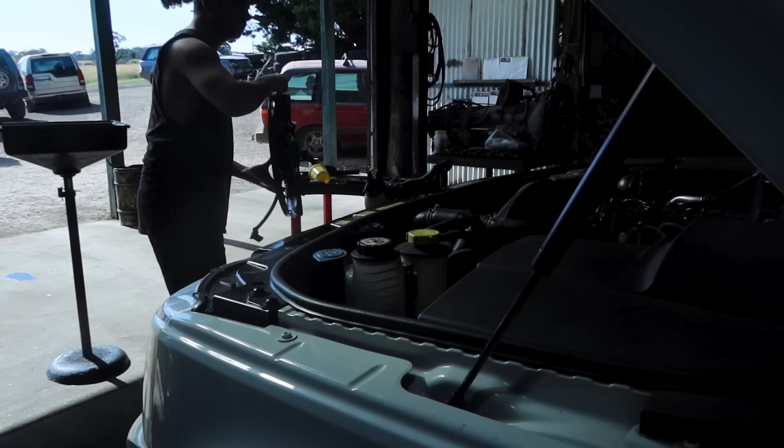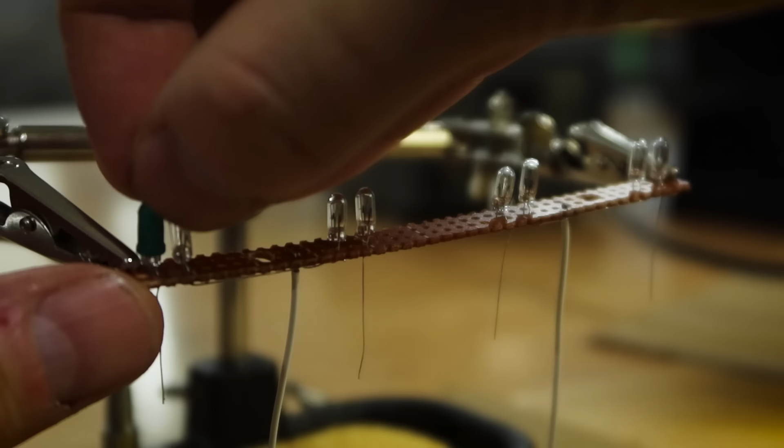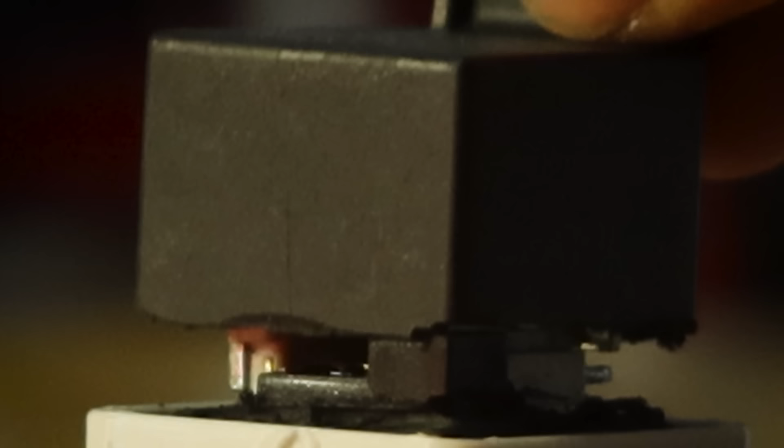In the last video, I had quite a few people asking me about a bit more detail in the design process. Like I said in the earlier video, I wasn't happy with the effort I put into V1 of the switch panel, so I started again, and the design idea became OEM Plus. I want the switch panel to look like it could have been an optional extra in 1974. So, what are our design considerations?

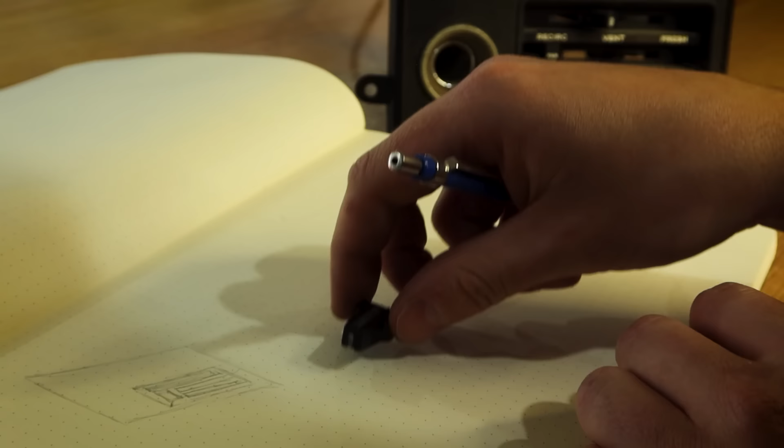You'll note this bezel detail around the heater controls is pretty prominent and also present on the radio section as well. So I'm going to take this as my inspiration for the outline or the border. The factory dash has these little knobs to adjust the heater controls, and so I thought I'd use them as inspiration for the new custom ones.

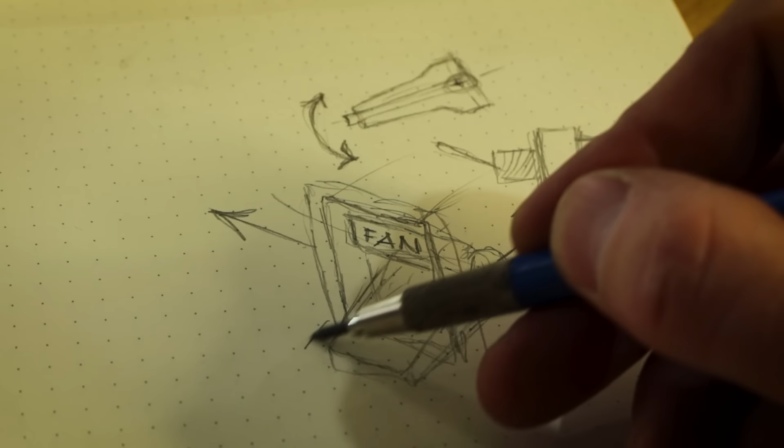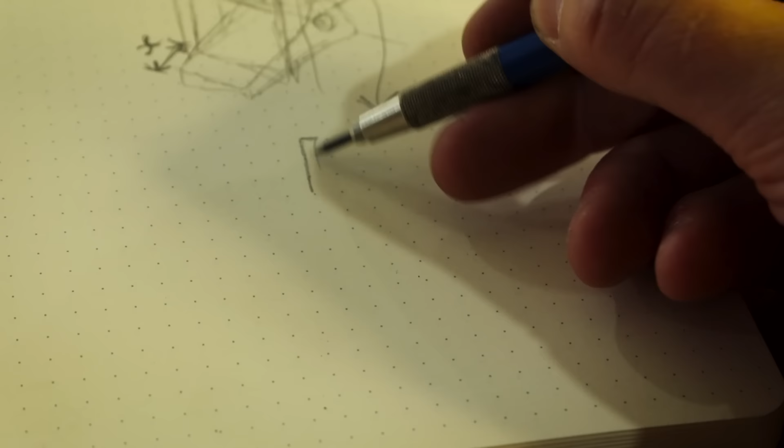I really like the vibe of a 70s and 80s Ferrari, De Tomaso, etc., and the chunky style switches. I imagine them having a nice solid clunk when you throw them, so I think I'd like to make an enlarged style switch inspired by these ones. I would also like the name of what I'm switching to be present, as well as an indicator light, so I combined the two, but I also want the text to be large enough to be read comfortably. So that basically gives us our minimum bound for the design.

Finally, I've got these old school Amori gauges that I want to incorporate, and given space restrictions, I decided on 2 gauges off to the side, which leaves us this space above the heater controls, which, given the other limitations I mentioned earlier, will divide nicely into 4. Cool. Now we've got a rough idea of layout, we need to think about packaging and manufacturing/assembly. So we've got these things to think about.

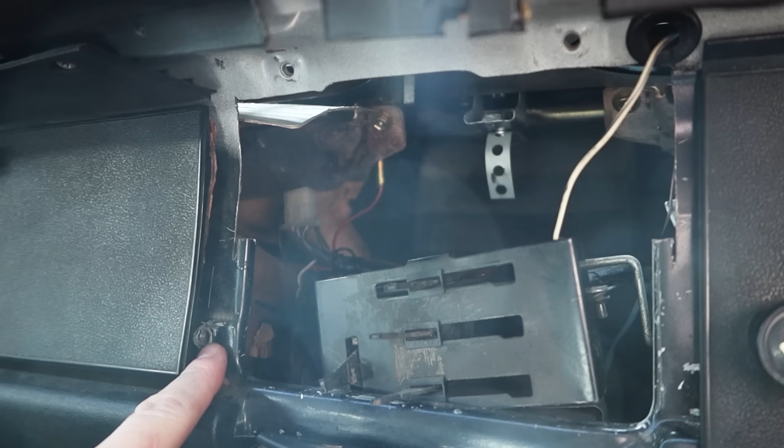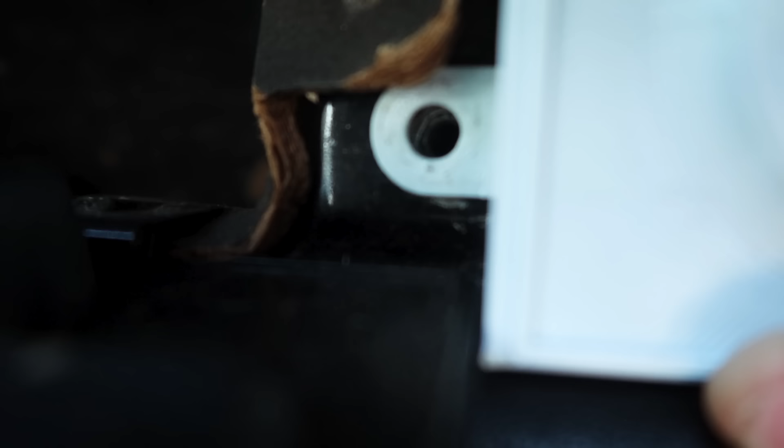Dash mounting points. The OE dash is a steel bracket with a plastic face. At this stage I'm not sure if I'm going to replicate that, but my initial thought is that I ideally wouldn't, and I'd just make the mounting points from the 3D print. Something else that I see people commonly do would be to modify the OEM part with their custom design. There's a few reasons that I don't like this. One is that if I ever wanted to make more, I'd have to get more OE fascias, and Toyota isn't exactly making new ones anymore.

Two, it can be difficult to be repeatable, and depending on the design it may introduce new limitations. But most of all, permanently modifying the vehicle is one of my last resorts. I like the idea of being able to return the car to stock if I ever wanted to, and as much as possible to be able to preserve the originality of non-replaceable parts. We could obviously argue specifics at this point, but you get the idea. If I don't have to do it, I'll try not to.

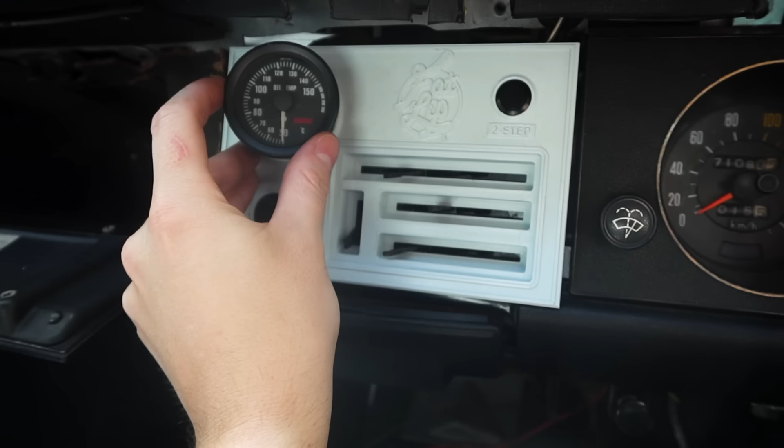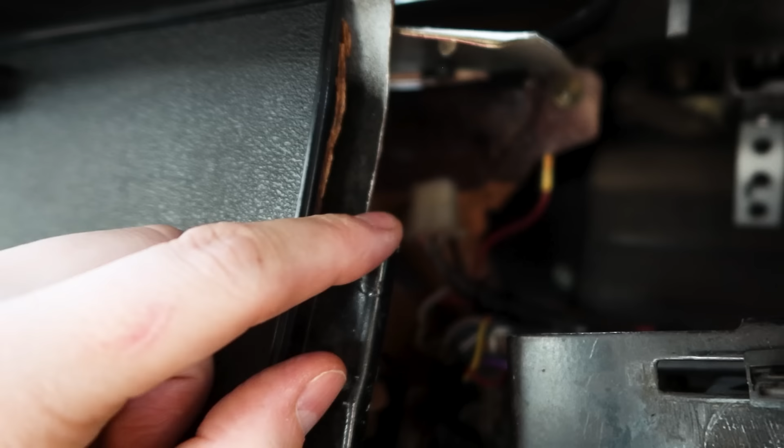Back to things to think about, I'd like the gauges to be slightly angled to the driver, and therefore, depending on the depth, they may exceed the envelope of this area and interfere with the frame of the dash. Not only that, we can see that mine has been somewhat unceremoniously cut to wedge an aftermarket head unit in there, so I want to make sure I don't make my design wider than the standard area, as then it wouldn't work in another car with a factory dash that hasn't been cut.

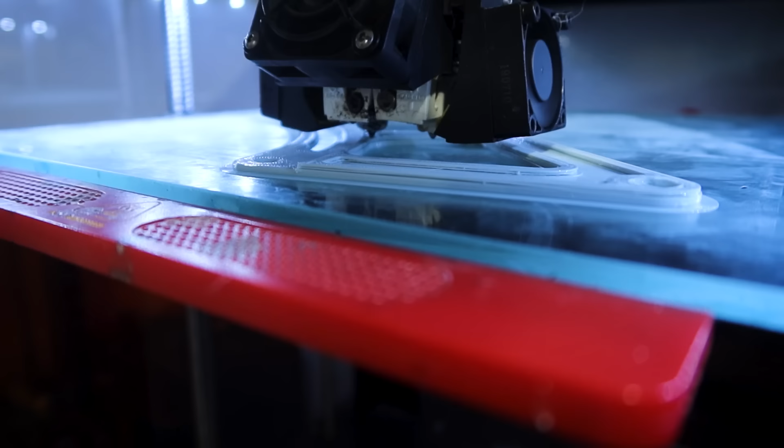The heater controls actually mount to the steel frame, and if I don't replicate or include a steel frame with my design, the plastic design needs to be strong enough and also provide some form of mounting solution as well. Finally, we need to determine what I'm at least initially thinking about manufacture. Likely it'll be a combination of resin and FDM printing.

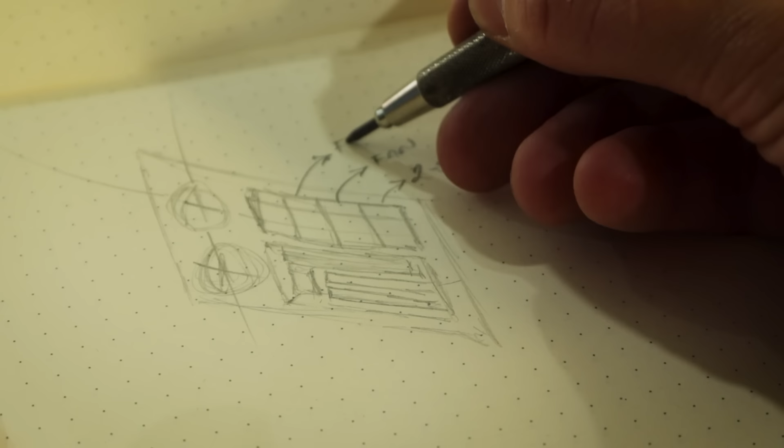Great, we're getting an idea here. Now what are the 4 switches going to control? I also have the need for a few more switches to control some other things in the future, but they're going to be mounted elsewhere. Okay, so what requirements do the 4 things I'm going to be switching have?

Well, the KE25 actually uses no relays from the factory. As a result, switches are known to suffer from burnout, particularly things with high load like the headlight switch, and they also use these dodgy little glass fuses. So in the perfect world, the whole car would get a rewire, but let's not become a victim of scope creep. Therefore, I'm thinking a relay box that feeds from the switch panel and to the components.

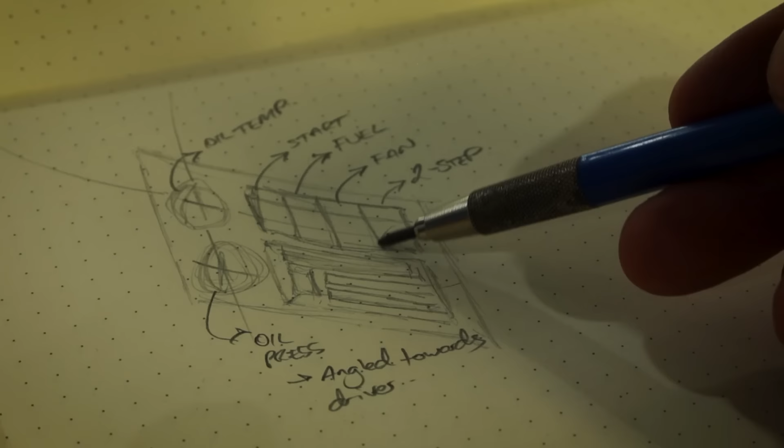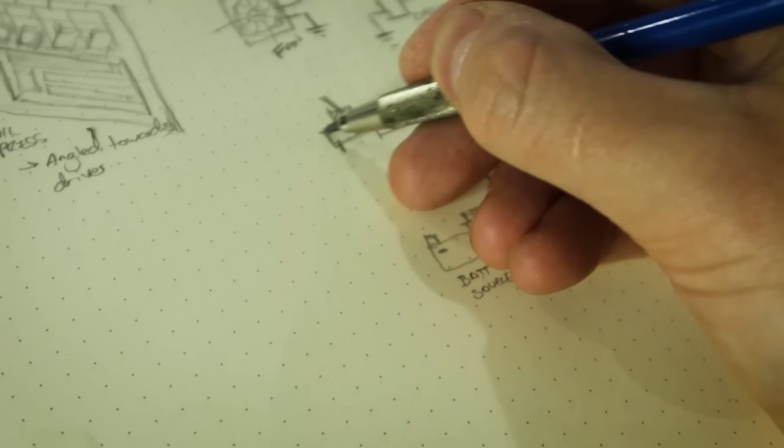So regardless of the physical reality of these systems, they do also have some minimum requirements for wiring that will have to be satisfied no matter what. So let's start there. So what are our thoughts here? We want the switch panel to be compact, we want the indicator lights, efficient wiring, and for the thermofan we want 2 switching options. This will require running switches on the ground side, however the latching loop for the 2-step requires wiring a switch on the positive side. So that means no matter what, we're going to need to run positive and negative wiring to our switch panel. Don't worry if that's gone over your head, I'll get to that.

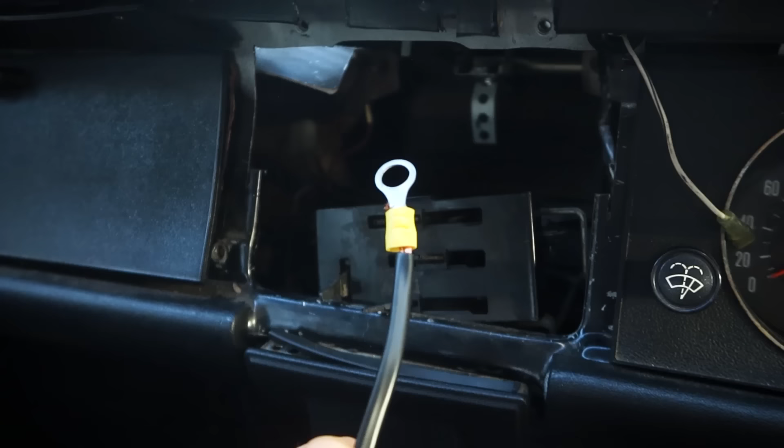Also, I don't want to forget this loop here, because if one or both of the lamps blow, I still want the circuit to be functional. We've also now determined that we're going to need at least 6 wires here, 1 for each switch and 1 each for positive 12 volt and ground. I could, in theory, run a ground wire straight from the unit to somewhere nearby on the chassis, but I think that'll look messy. I'd like it all to be nice and tidy with just the one connector.

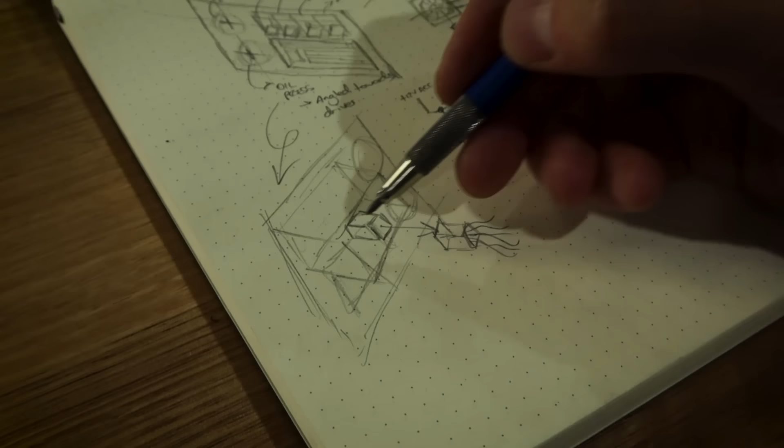So how are we going to wire it? I'd like the switch to be standalone, so we're going to put a plug in here. I could make it with a loose tail, but I think I would like it to be recessed into the unit and all nice and self-contained. As we've determined we need 6 wires, for now I've decided on this 6-pin Deutsch style plug.

There is temptation here to just get stuck into the switch panel design, but we don't know what we don't know. And I'm a mechanical engineer, not an electrical engineer, or an auto electrician. So let's finish our electrical plan and also run a bench test to make sure everything's going to work as we intend it to. This is another one of those times where I wouldn't normally share something that's unfinished, but consider this a work in progress.

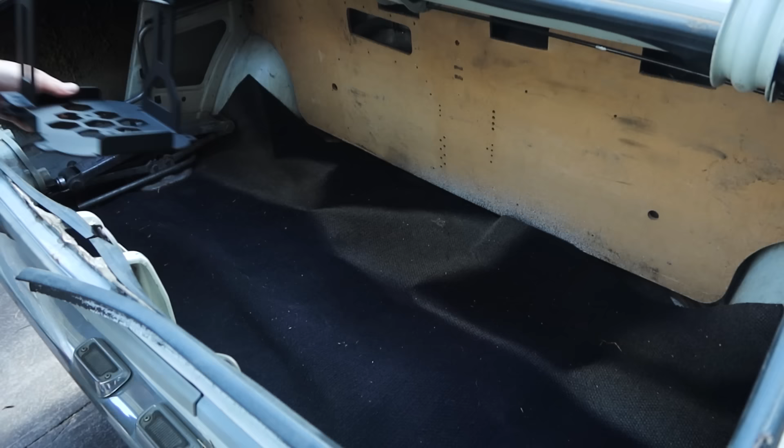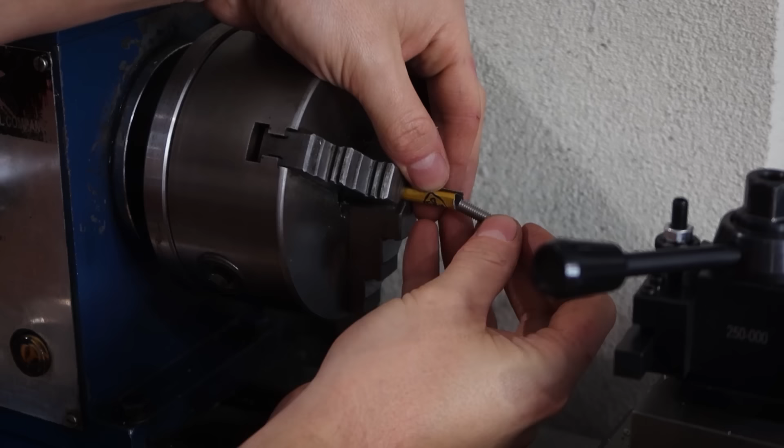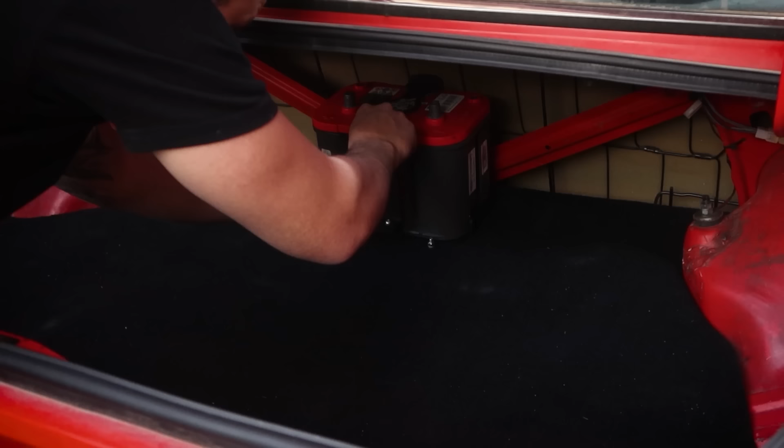Why is this important? Well, that will move the power source from the front of the car to the rear. So I need to ensure that whatever I make is flexible enough that changing the setup won't affect what I'm making now in the future.

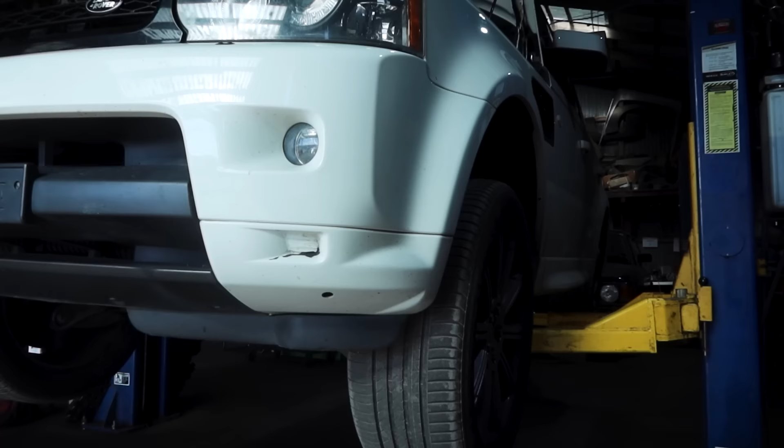Here's where I must interrupt our progress, as the L320 decided to start leaking power steering fluid.

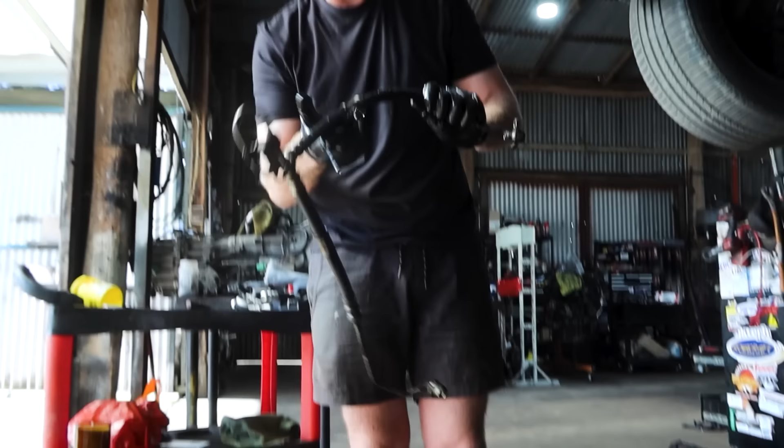And luckily, there's nothing Angelo would rather do more on a Saturday morning than work on my car. I'm pretty tempted to cut these. Holy shit. And obviously I was doing all the hard work. Someone's had a go at this. Oh man, they taped it up. They do a good job. No.

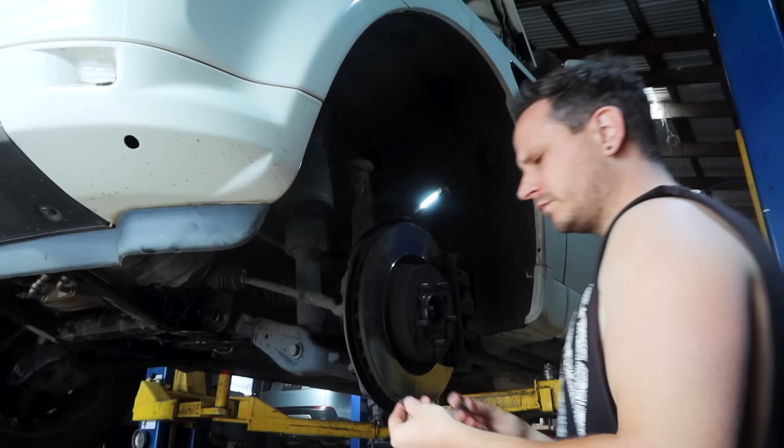Turns out, for reasons unknown, the power steering line decided to migrate over and become friends with the thermofan, and believe it or not, cars that weigh over 2.5 tonnes receive some benefit from functioning power steering systems. But all things considered, it actually was one of those jobs that should have only taken an hour, and in fact only took an hour. I guess it's a Christmas miracle. Thanks, Santa. I mean, Angelo.

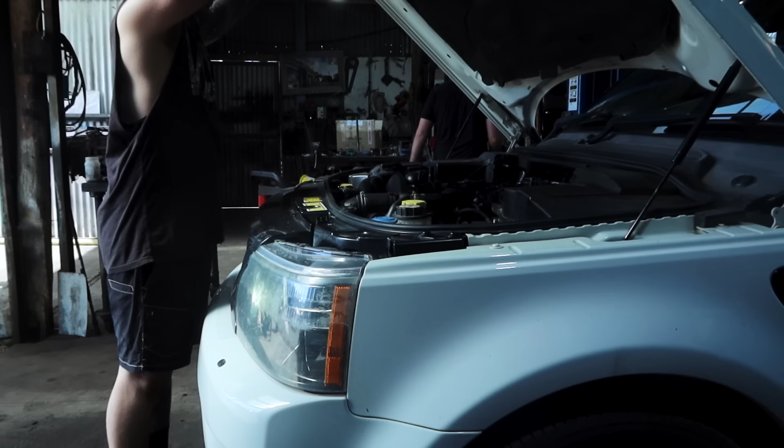Okay, specifics. Let's talk about switches. So I've been talking a lot already about packaging, and being that we're running an external relay setup, there's no reason we can't run some nice, small and compact switches here. However, these ones just don't have that sound and feeling I want. So I got these ones. Cool, how are we going to integrate this?

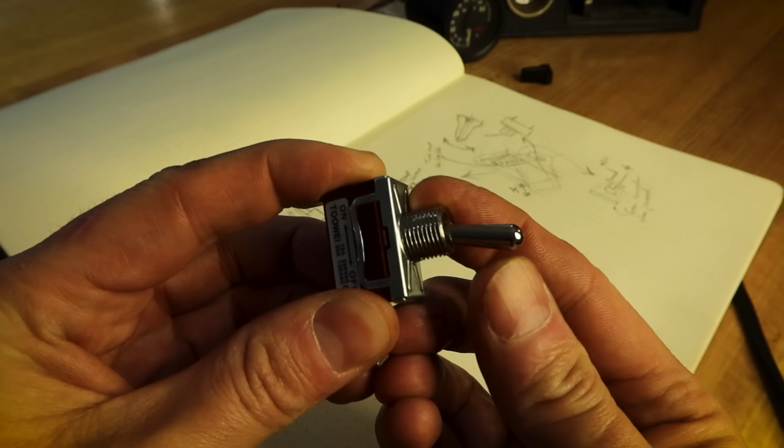I like to make a CAD model. Does it need to be as detailed as this? Absolutely not, and I don't always do them to this level of detail, but I do like to. Another positive thing of having the detail in this is that I know that if I come back to this months or even years later, the model is accurate and there's nothing I need to remember that I left off the model.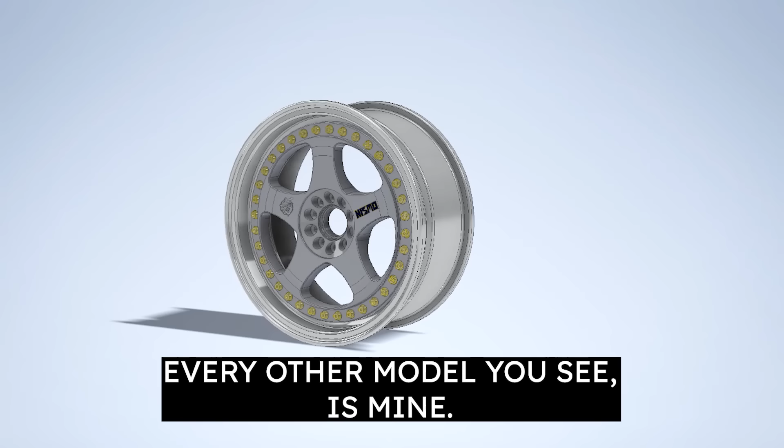Yes, I am aware of websites like GrabCAD and similar. If you want to use them, more power to you. Sometimes I do it too for things I don't have immediate access to, but I prefer to make my own models where possible. Also, if you want to get good at something, you should practice it. If you want to know how other people make things and manufacturing considerations, etc., you need to put in the work. I cannot stress this enough.

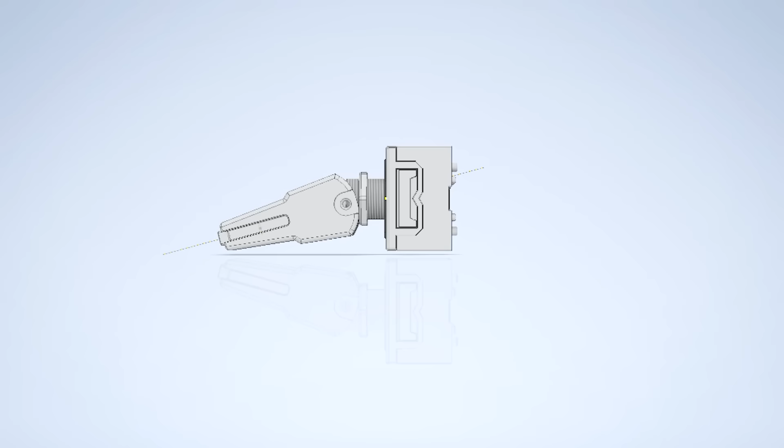Alright, cool. We've got our switch. My first thought is about how I'm going to cover it with my inspired switch design, so I'll sketch that over the top. And now we need to think about the pivot point of both my cover and the switch itself. If the pivot points are not the same, or at the very least close, the cover is either going to be too tight to work or too loose to work. We also need to make sure that there's enough clearance inside the mounting hole, again, otherwise it will get stuck or it'll be sloppy on the switch and it won't feel nice to use.

Ryan, you said you were going to give us more detail, then that switch just came out of nowhere. How do I model that? Firstly, get yourself a pair of these. This is a vernier caliper and you don't need an expensive pair to start. This is a pair from Supercheap and they were under 25 Australian dollars. Yes, you can get digital ones, but I don't like them. If for no other reason than the time that you really need them is always the time that the battery is dead.

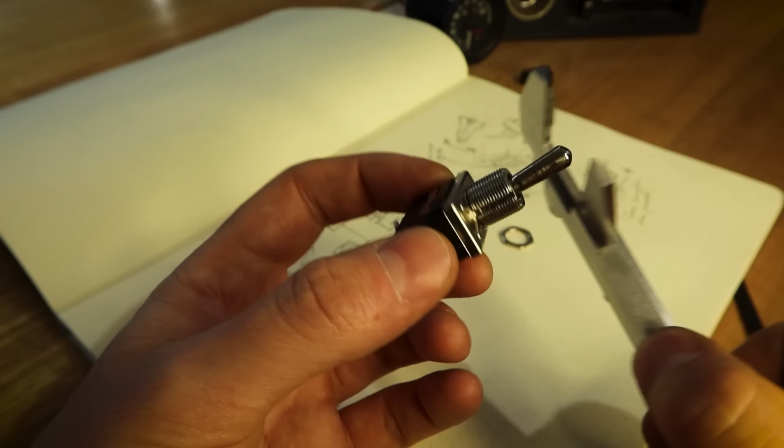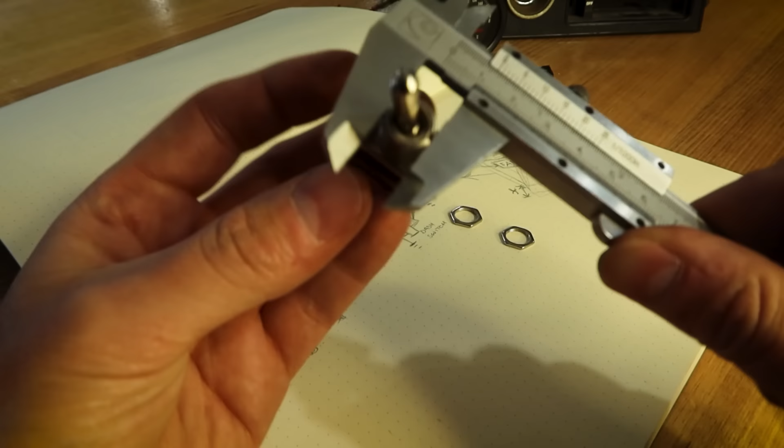Now this is one of those things that I'm going to summarize because this is practically a course in itself. You should model ideally around a central datum. In this case, I'll use the mounting thread which is central to the switch, then break it down into pieces. The thread is a cylinder, the body is a rectangle, as are the connection tabs, and the switch lever itself is a tapered cylinder. Okay, then what?

Measure it, model it, check it, make mistakes, and keep trying. Practice, practice, practice. It's easy to sum it up. Practice, practice, practice, man.

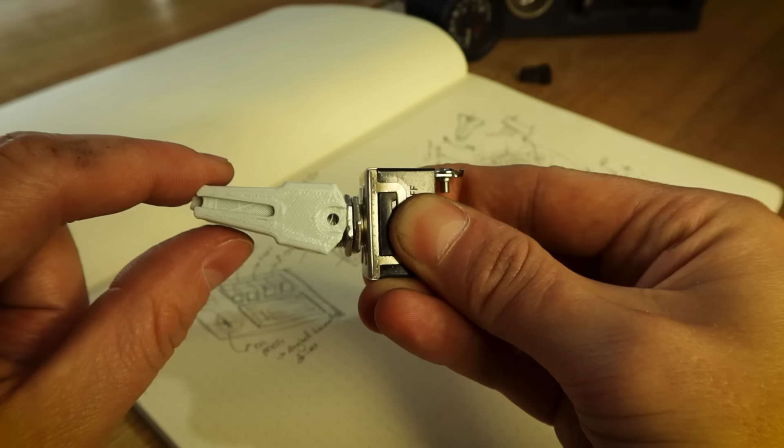Well, the switches are designed to secure over this threaded section here, so we'll stick with that, and then we've got the cover. It makes the most sense to mount on the axis of the pivot point, so we'll do that too. A little extra design consideration here. I'm going to put a little boss on the pocket and a little recess on the switch. This achieves a few things.

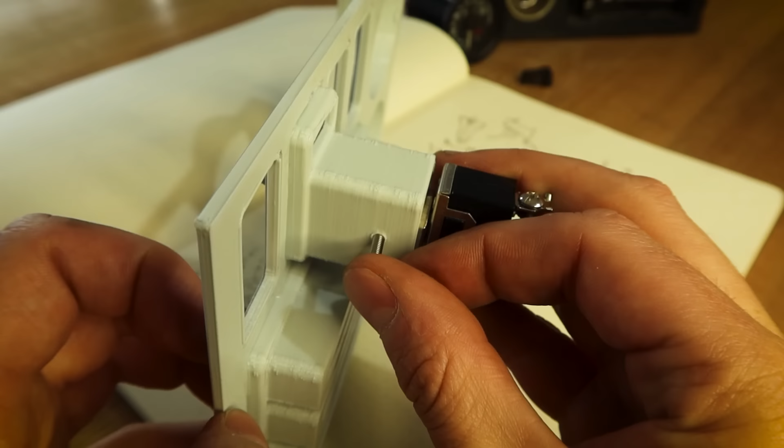It takes the pressure off the pin that I put in here for if and when people push on the switch as opposed to just flipping it. It gives more of a positive positioning of the switch cover and something for it to rotate comfortably about. Therefore, not all of the pressure and function is relying on the pin now, and so it helps ensure smooth use over time and helps prevent excessive wear of the pin joint.

Cool, now I want to think about how far the switch actually protrudes past the front face of the dash. I want them to be protruding because of the tight space here. I can already see that if they don't, they're going to hit the bottom of the pocket and it's going to be hard to get a finger underneath. That said, I don't want them sticking out too far because then they could be too easy to accidentally knock when going for one of the other switches. None of these are particularly critical though. There's no ejecto-seats here.

Just a note while we're here, some of this process is done quite quickly, possibly in my head or as a quick little sketch. And it's often a combination of CAD drawings, CAD models, and or pen and paper drawings. Regardless of the exact process, you get the idea, the same concept applies. There's a lot of back and forth with the design to get to this point, but I'm ready now to make a print and test the changes. So let's go over them.

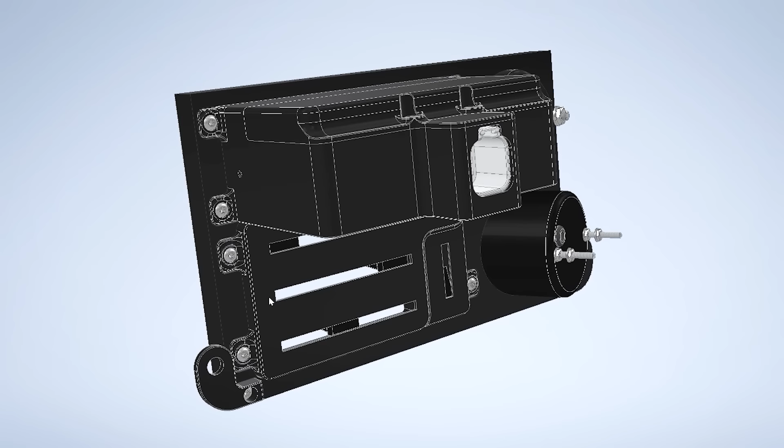Firstly, you can see I've thickened up the body a lot from the previous prints. And you might be wondering why I made them so thin in the first place. This is for a few reasons. Less material on the part means it's faster to print. With it being completely flat on the back, it means I don't need support material, and most obviously, less material means less waste, means cheaper.

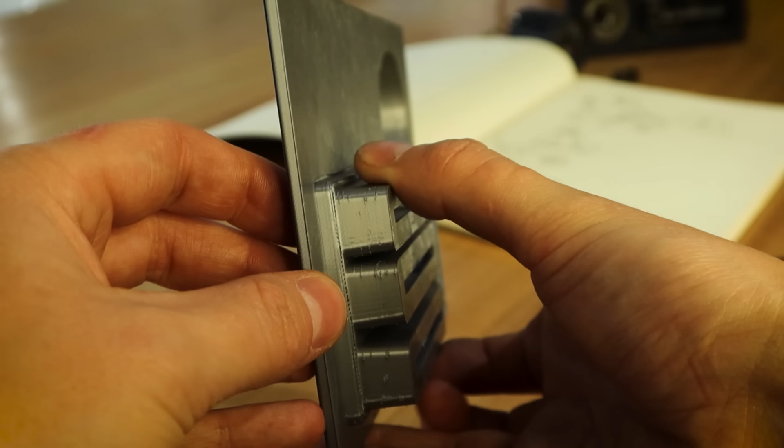That's why I separated the heater control portion here, but then I needed to attach it to test it. For a prototype, this is fine, but you can see that as a final product, there's very little strength here, and it wouldn't take much for it to break. So if I still plan to print in separate pieces, how am I going to securely attach the parts? Again, there are multiple solutions to this problem, and for now, I've chosen heat-set inserts, which are essentially a metal thread that you melt into your chosen part. I'll cover these in further detail later, but for now, here's my model.

You may not have gotten much from my earlier sketch of the plug being a part of the housing, but here's what I was thinking. It's still removable, and it's located on its sides by the main body, then held in place by the lid when attached. Moving on to the indicator lights, hopefully now you have a better idea of what I was thinking earlier, and you can see how this initial sketch is now turned into something ready for testing.

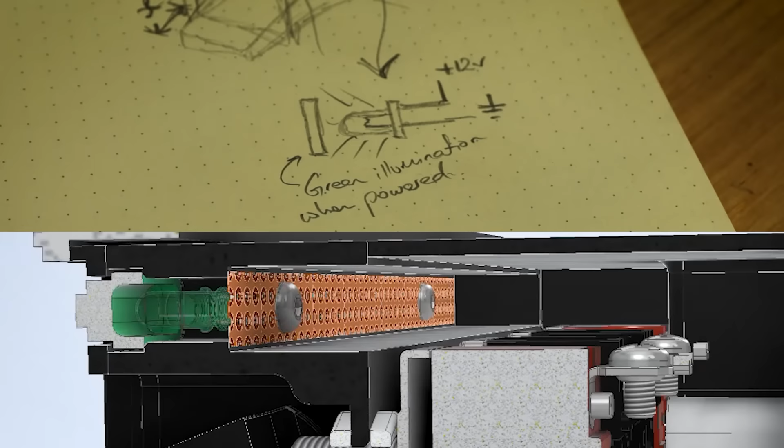The lamps will all be mounted on a single strip of perf board, secured with some M3 screws, and I'll be using incandescent lights rather than LEDs. There's a couple of reasons for this, mostly being that I don't really like the harshness of LEDs, dimmed or not, but also because I want to match the type of light that we're going to get from the pre-existing lamps in the dash.

You've probably also noticed that the lamps in the OEM dash are clear, meaning that the translucent green colour is coming from the dash itself, while I've modelled both a green cover for the lamps as well as a translucent section as well. This is mostly for aesthetics in the CAD model, and the finals will be clear rather than the green as you see here.

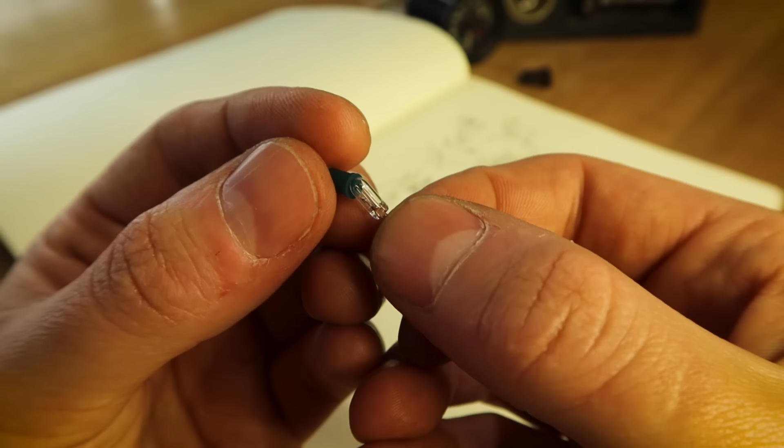These are the little sleeves that I'll be using for the coloured indicator, and I may use some of the other colours in the future as well. Finally, part of the redesign meant a change to these mounting points, which are now also secured with M3 screws.

Now it's time to prepare the mounting board for the indicator lamps. I've gone with perf board here. I could have also used green board or a PCB, which I will concede looks nicer, but it's not as easy to cut to shape. Besides, the amber brown of the phenolic resin is giving me 70s 80s vibes anyway.

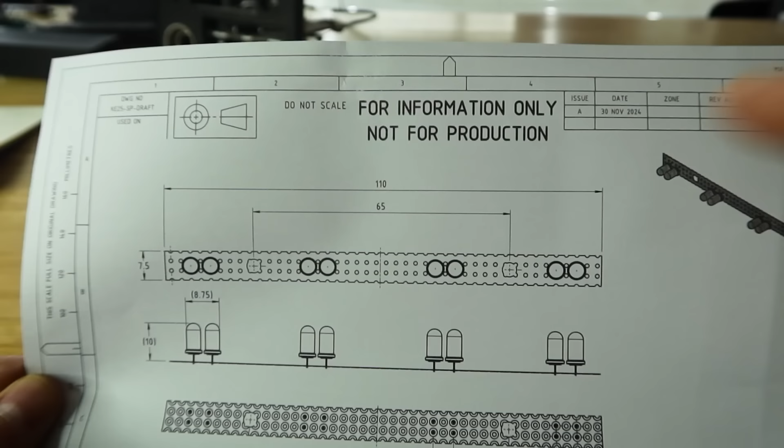Another reason why it's advantageous to put the effort in with the early stages of design is we can create accurate drawings quickly and easily. This is just a draft, so don't come at me with AS 1100 standards. I practically know these dimensions off by heart now anyway. I just need the width and height, which is in millimeters for those of you playing at home.

Something I like to do when using a tape or ruler for measurements like this is rather than using the very end, I jump up to the next whole number and measure from there. So we're going to measure from 120 millimeters to 10 millimeters rather than 110 to 0.

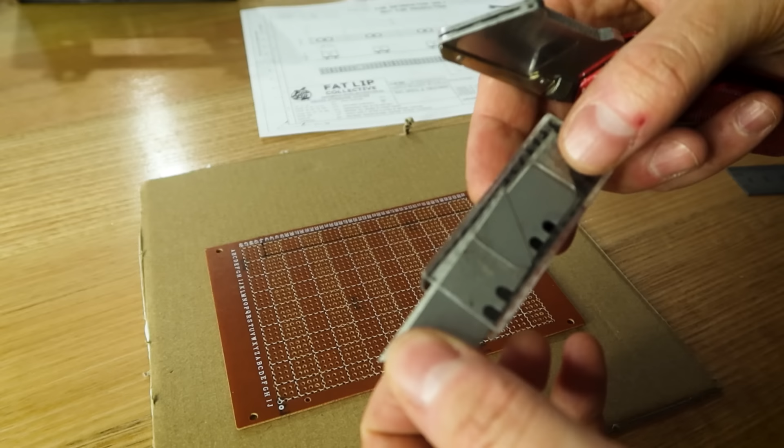Now I've never actually cut perf board before, but I'm led to believe it should be pretty easy to just score with a blade and snap off. I'm resisting the temptation to cut with something else, and I figure it'll be pretty easy to dress the edges if I need to. Also, everything in me is telling me not to cut on this bench because I don't have a proper cutting mat beneath it, but I'm gonna.

If I was smart, I would have done this edge first, because now it's going to be much harder to hold on to this. Should clean up pretty good. What's that saying? Do as I say, not as I do. Don't do this. Do this one.

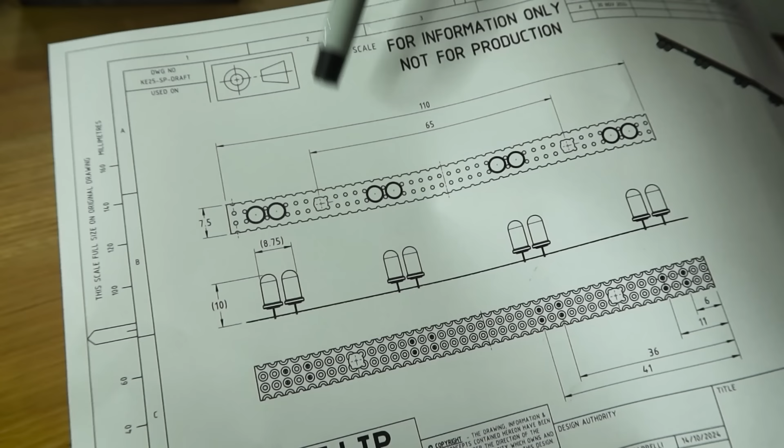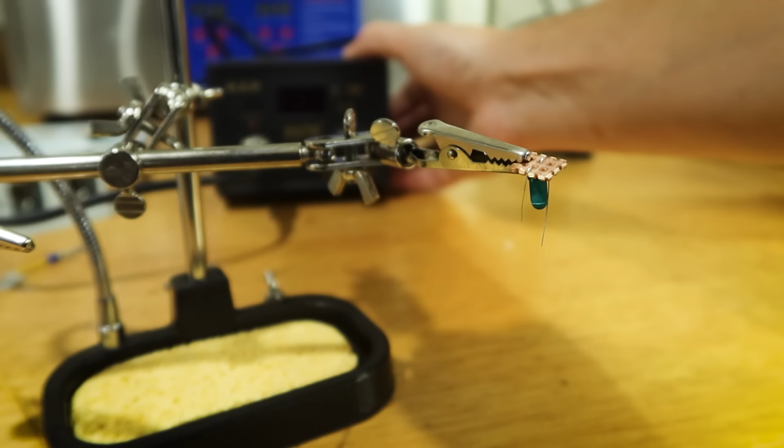Also, those among you who aren't watching this at 5 AM might realise that I forgot the hole dimensions on the drawing. Luckily I know they're 3.5mm. I'm sure you know how a drill works, so I'm going to drill them off camera. And in the meantime, let's prep a couple of the lamps for testing our circuits, using the perf board offcuts. Waste not, want not.

In the spirit of explaining how things work, I thought this might be a good opportunity to actually show what a relay is and how it works. It is, essentially, just an electromagnet, but let's see how they really tick.

I also hear they taste good with fava beans.

Hello, Clarice. Cool, huh? This is a 5-pin relay, and without complicating things right now, just know that the function is identical to a 4-pin relay, except we have the option of alternating power to another circuit. Stay with me, I promise it's very simple. Let's mark out the points here and I'll explain what each of the wires are doing.

Consider this direct power from the battery. Regardless of whether the car is on or off, as long as the battery is connected, there's power here. Depending on what we're looking to power, we should add a fuse to this wire. The size of the fuse will depend on what we're powering.

A common rule of thumb for this is that our fuse should be 1.25 times the amp draw of our item. So for example, in the case of the thermofan I have, it's rated at less than or equal to 7.5 amps, so multiplied by 1.25, that means we should use a fuse rated to 9.375 amps.

We probably should round down, but in this case, I'm sure a 10 amp fuse will be fine. As I said, this wire is constantly powered, but we don't want our item to be constantly powered, so we need some sort of switch. In this case, we'll consider these coloured lamps our item, and regardless of what we'd chosen, they'd then need to be run to ground afterwards.

You saw me mention earlier about the KE25 having no relays, and the power just running through the switches. Why is that bad? Well, basically, not all switches are rated to have such large currents pass through them. We want nice little switches in our dash, not big ones like this.

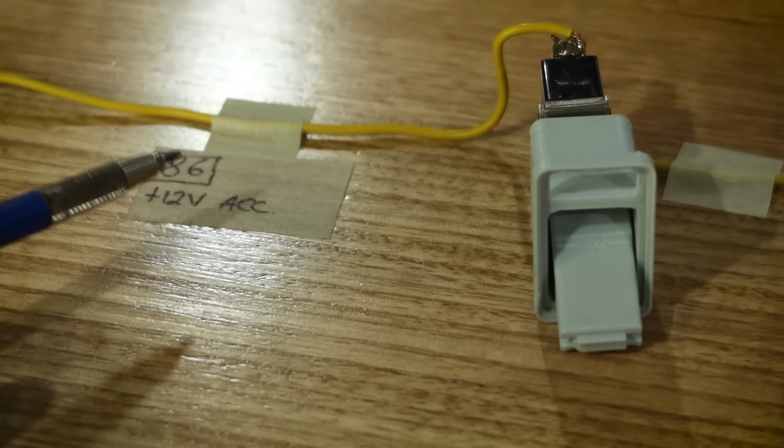So by using a relay, we can get our power to our item safely. The relay only requires a very low load to switch between supplying or not supplying power, and that's what this switch does. It activates the relay, and it must also be run to ground.

Alright, so what's this normally open, normally closed business? Let's first take half a step back. I said this was a 5-pin relay, but what's the difference to a 4-pin relay? Simply, it just means either of these pins here have power. As we switch between them, you can see this little flap or armature makes contact with one or the other pin, and as such, either our red or our green lamp has power.

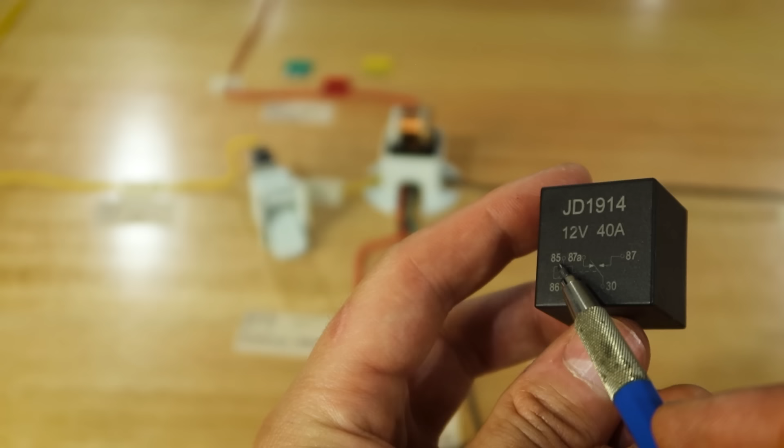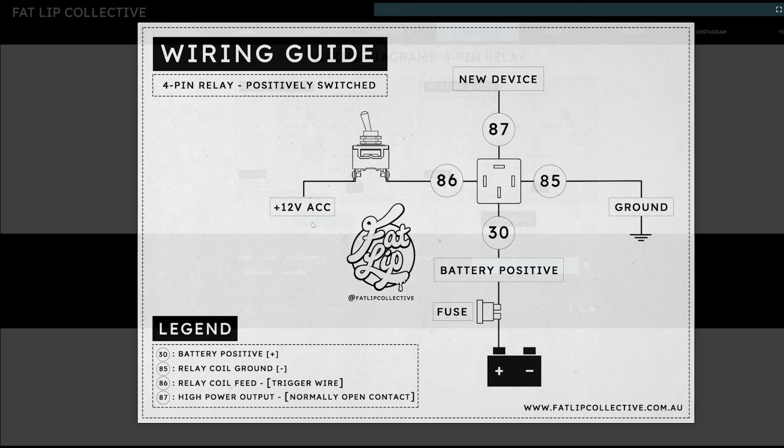We can make a 5-pin relay function like a 4-pin relay by simply not wiring anything to the 5th pin. It's marked here as 87A or normally closed. So we just get rid of our circuit with the green light here, and therefore power would only be supplied by this relay when we flip our switch. I've also put a couple of diagrams up on my website showing both a positively and negatively switched 4-pin relay, and I'll add to these in the future.

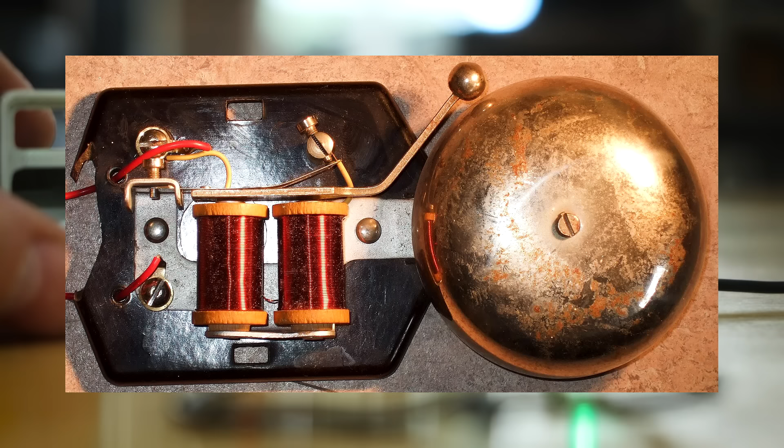This concept is usually what was used for those really old school bells, and is in fact also the same concept that was used for original tattoo machines, which I actually started making one of a while ago. Here's one of my initial prototypes. Do you see what I mean about too much detail? I will literally go on forever. But if that's what you want, let me know. Otherwise, let's get back to it.

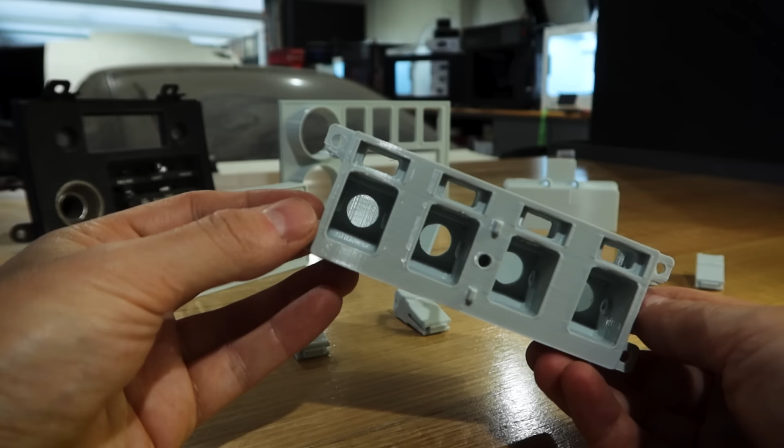Now it's time to finally check out the prototypes that I've printed. As I mentioned earlier, these are just printed from PLA. It's cheap and easy to print with, and it's actually also quite strong. And my initial thoughts on the design now that I'm able to hold it in my hands is that overall I'm pretty happy with the direction that it's heading. Although somehow I managed to print this main body here with support structure not selected in the slicer, and considering that, it's actually come out amazingly well. Just a couple of little rough spots.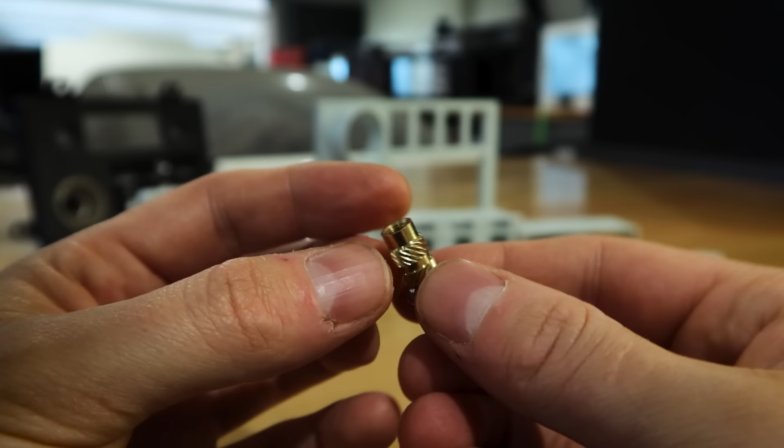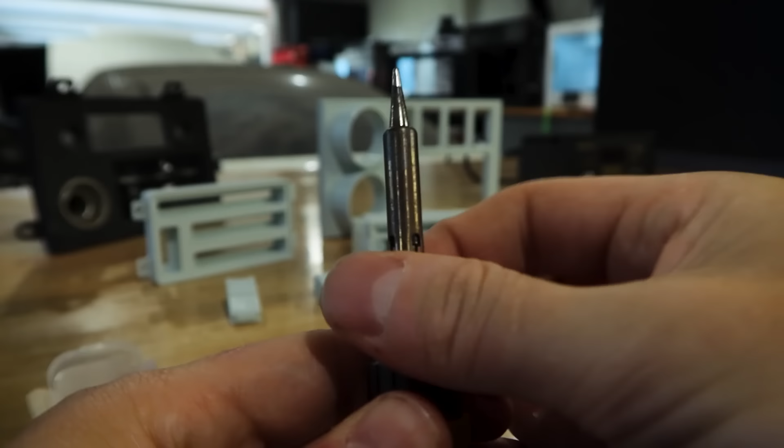Now let's talk about heat sets again. These are little brass bodies with threads on the inside and some burrs on the outside to help prevent them from twisting while in use. You create a hole in your part to suit the outer body, and then heat them up to melt them in there. As you can see, they come in all different sizes and threads, and there are different sized heated tips to suit. Let's get the soldering iron sorted and test them out. I print this particular PLA at around 215 degrees C, but I'm going to initially set the iron to a lower temperature and see how that goes. We can always turn it up later.

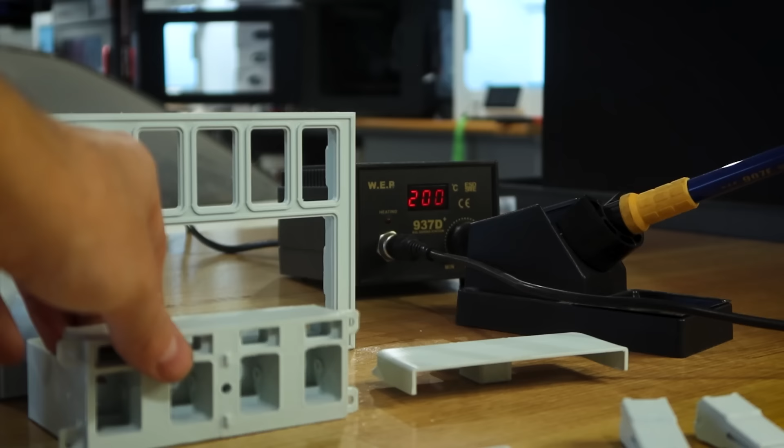Wow, I've got to say that actually looks pretty snazzy. The front face portion is mainly to hold the indicator light labels, which I haven't got to put in there just yet, but I think it's going to work perfectly.

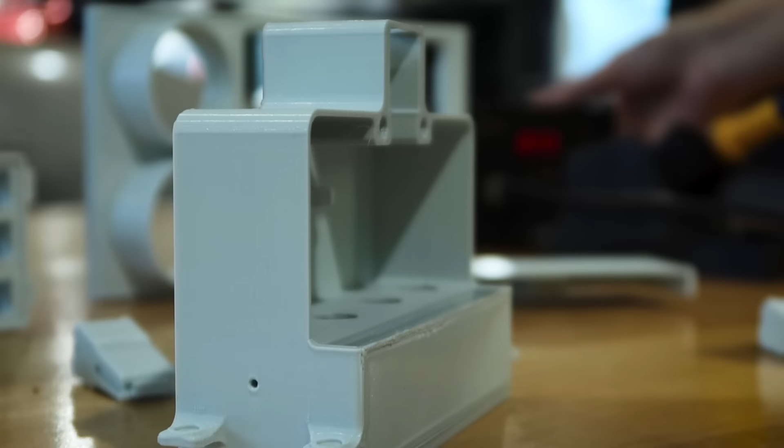We'll test out a couple more heat sets, and here's one of our first lessons about why mechanics and practical people hate engineers. This looked perfect in CAD, but we've got a bit of an issue getting the soldering iron in here. It's not actually a huge issue in this case, as it won't cause the thread to be too off center, but that would have been a possibility, as well as possibly not even fitting in the iron at all. Anyway, they're looking pretty good now, and it's time to trial fit our perf board and a couple of switches in there.

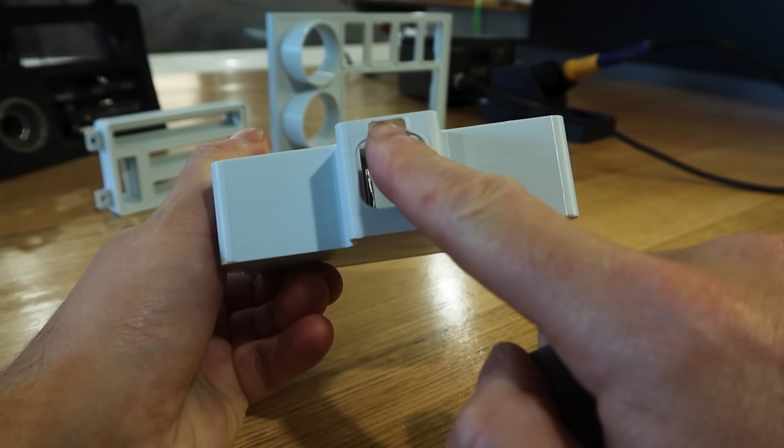And now we're on to our next issue, this little guy. You can see we measured everything perfectly, and this connector is perfectly snug in there, but now we can't get it past that lip. Also, we can just squeeze each of these connector types onto the switches, but how are we going to get to the bottom ones?

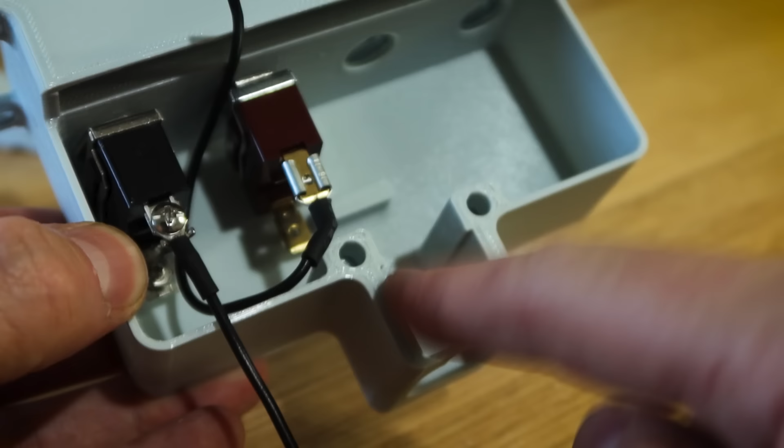And so this shows you another CAD trap, trying to make everything too snug. There's no reason I can't make this area in here larger. There's plenty of space inside the dash, and it'll not only allow me more room to work, but also allow me to sort out some nice cable management as well.

Let's at least put some more heat inserts in before swapping the iron back to a soldering iron tip. Another thing we've done is gotten a bit too carried away with the amount of heat inserts. We can probably drop both of these pieces down to 2 each rather than the 4.

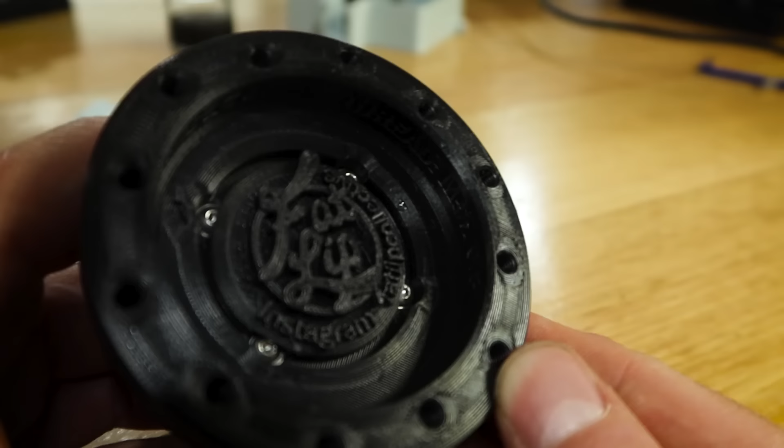Let's stop for a second and also talk about heat inserts versus just tapping the part. There's actually nothing wrong with tapping a 3D print. I do it all the time. In fact, I've sold hundreds of different variations of simulator adapters over the years, and they're all tapped. And I've been using the exact same one on my sim for over 5 years, and each and every one of them is tapped. Again, to prevent this from being lengthy, I'll summarize.

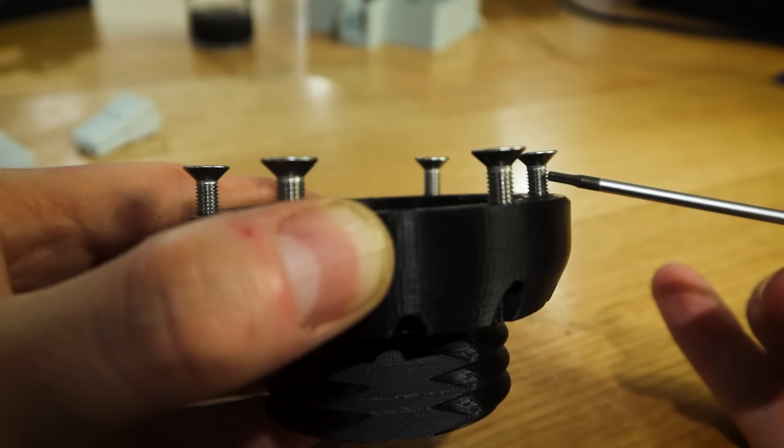Even if you had a bottoming tap, which is generally not ideal, it's preferable to not tap into a blind hole, i.e. one that doesn't go all the way through. And if the thread is going to see a lot of use, you probably would want the heat insert. You can also print threads like this bad boy here, but basically the smaller the thread, the less suitable for printing.

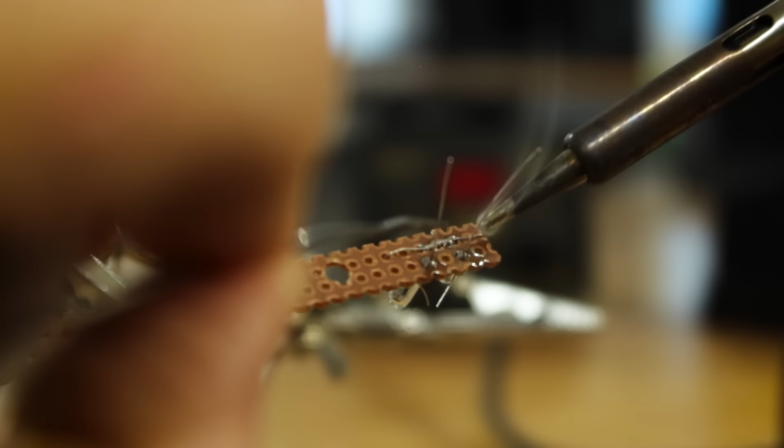Anyway, let's get these lamps soldered in ready for testing. For now, I'm going to wire them in series. I may change to parallel in the future, but we'll see how bright these are first. And I'm going to cover more of this when I cover wiring in the next video. And I reckon that's looking pretty good.

So some of these issues we've gone over were probably more obvious than others, and you may have picked up on some of them earlier in the video, or maybe not. Again, this is why it's good to test things as you go, before you run off and commit to a design and possibly pay for a bunch of manufacturing, only to realize your errors when it's too late. It's really what 3D printing is perfect for: fail fast and fail often. It will get you to a better solution quicker.

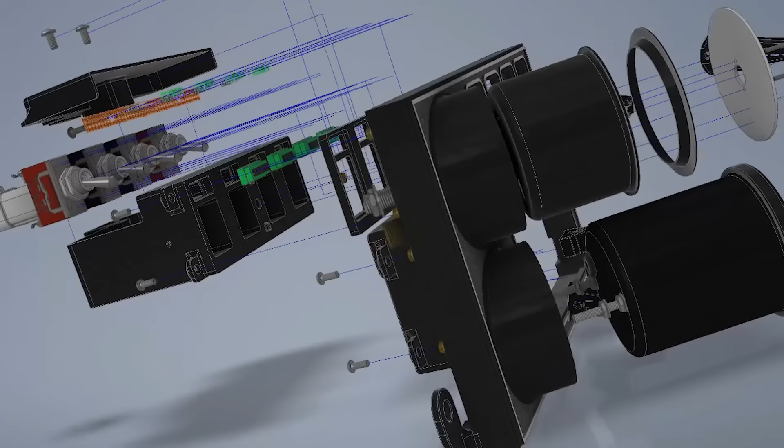So this video actually took ages to get together and cover everything. I reckon in the time it took me to make this, I could have practically finished the car. We've still got lots to go over in the next one. I'm going to cover different materials for printing, as well as FDM and resin printing, making the changes that we've already discussed, as well as quite a few that we haven't, 3D printing processes, wiring, and whatever else strikes my mood at the time, to be honest.